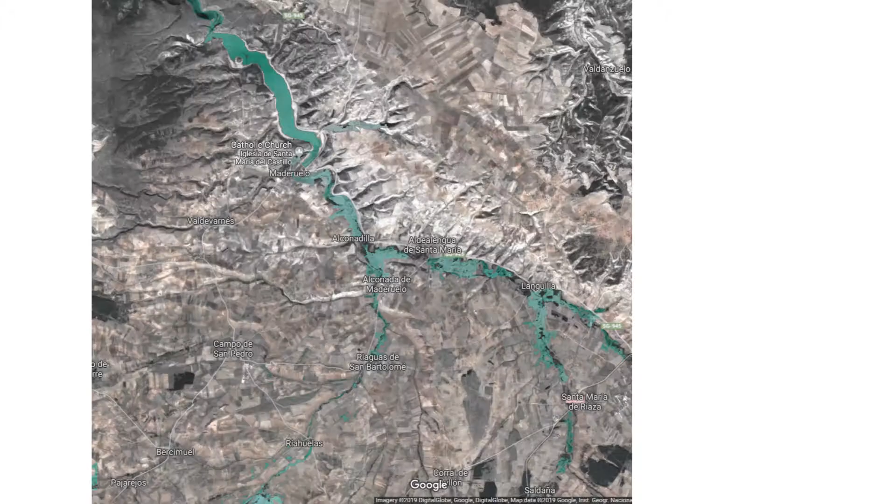Project Fulcrum seeks to develop an architectural language with which to harness the natural qualities in the rural areas of Spain, be it formal, compositional, material, and spatial, for the benefit of these now fading areas.

This aspiration envelops a constant tension between the appreciation of nature in its primal and untouched forms and the will to use it as a resource and expose its potential.

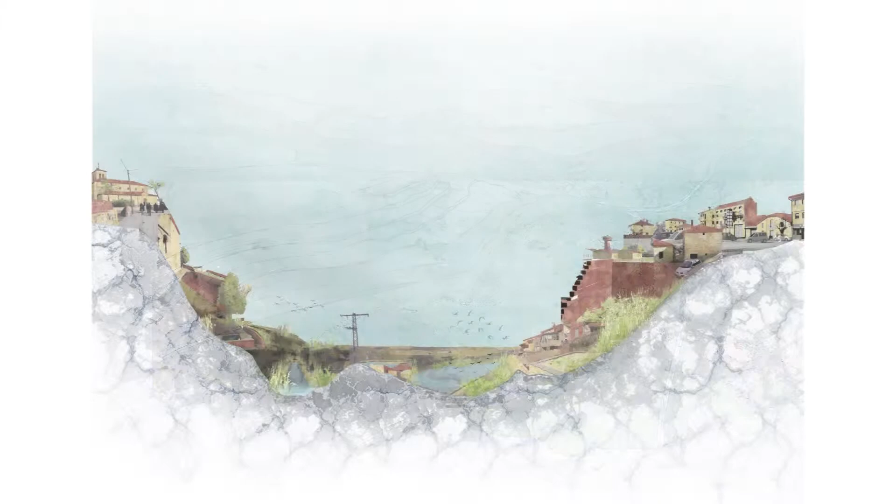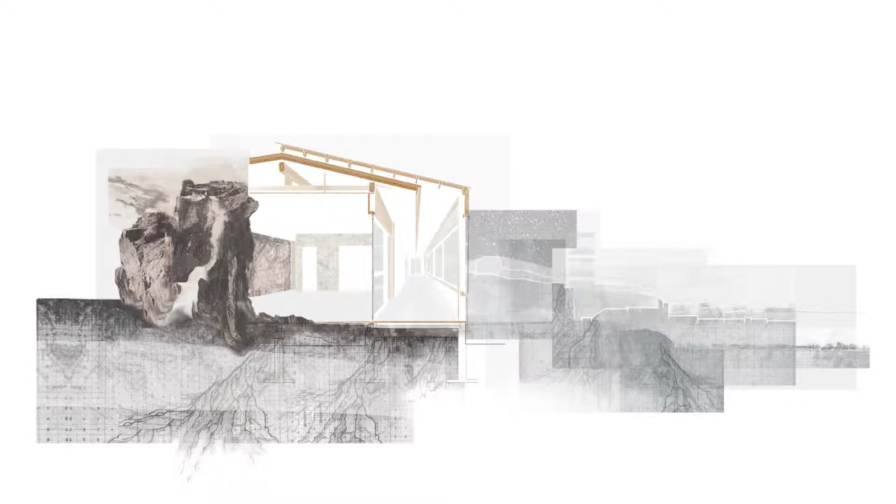The valley, which borders 3 villages, the flora and fauna, the topographical variety, and the existing buildings' characteristics function as the material palette from which the project is derived.

These create dispersed systems of spaces containing different additions to the areas for locals and visitors alike, as well as for the development of the landscape.

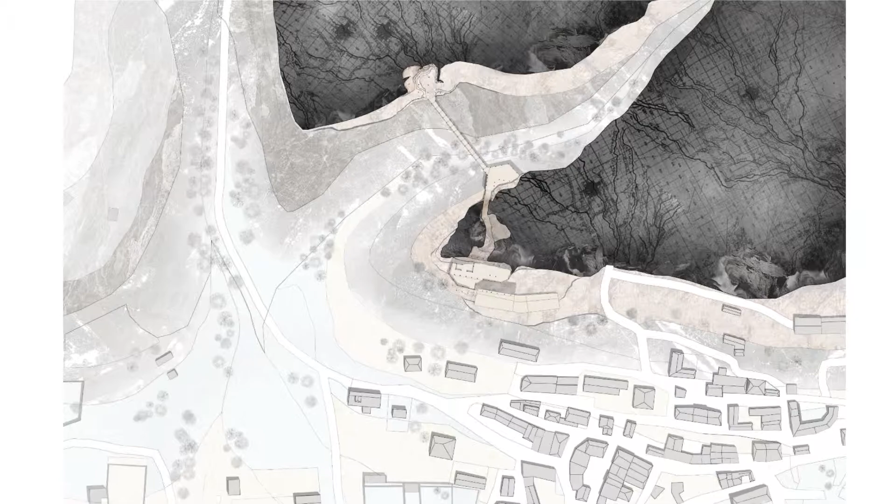These systems include geological and wildlife centers, observatories, public spaces, restaurants, and more along the villages. Each of these is located according to its surroundings, its relationship between the mountains, the valleys, and the built.

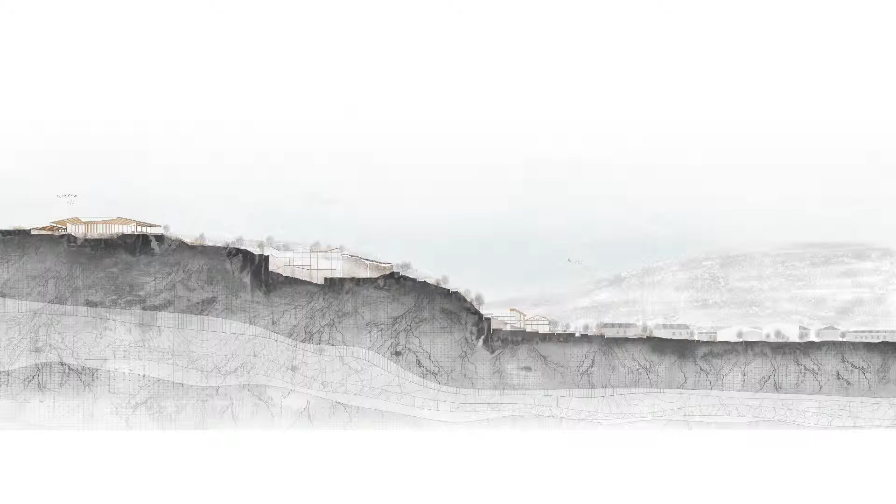The architecture in the project reacts to the natural silhouette of the hills and mountains, sometimes echoing it, other times mirroring or contrasting it.

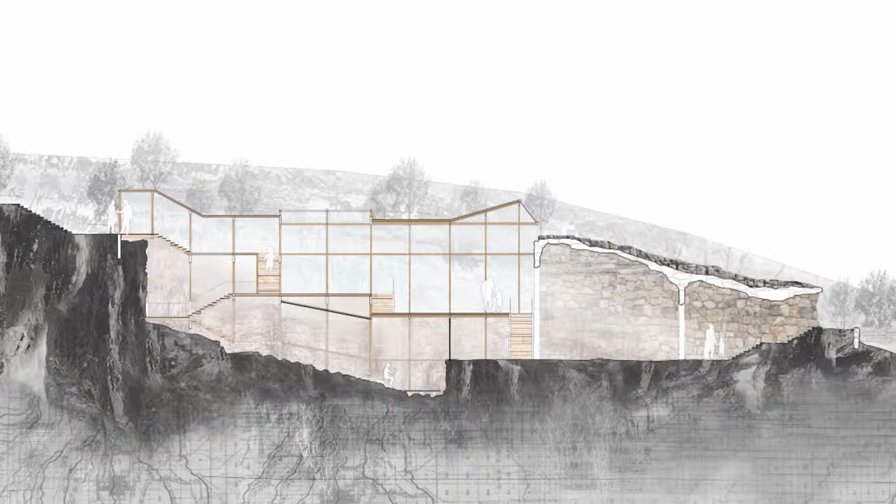The interventions are made of 2 languages, heavy and light. The heavy language's syllables are the local rocks and soil, exposed and become an integral part of the architecture, to which the typical local stone walls connect.

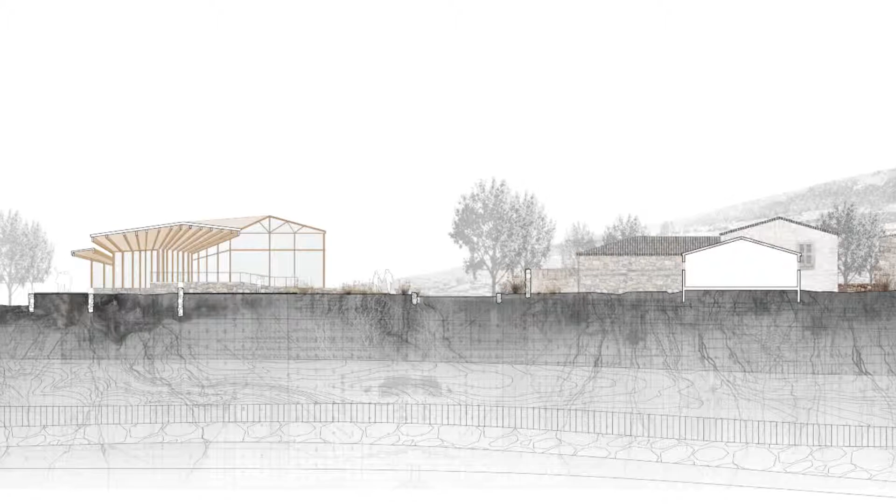The light language's forms derive out of the existing building typologies of Segovia. It is one of wooden beams and glass, local, low-cost, and environmentally-friendly materials, which allows light to wash the rocks and coves, emphasizing the eroded layers of the rocks by floating over them.

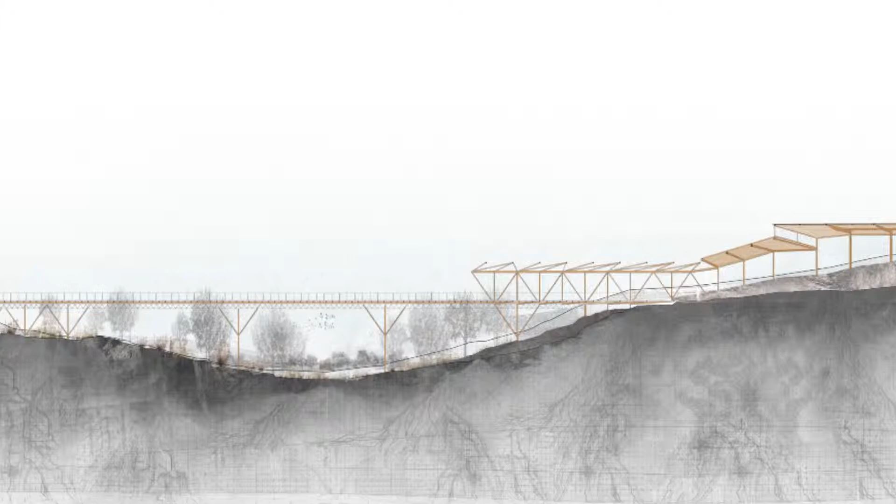The project proposes a relationship in which an equilibrium may be achieved between the natural and the built, the higher and the lower, light and heavy, between the local populations and the ones who'll visit, the permanent and the temporary.